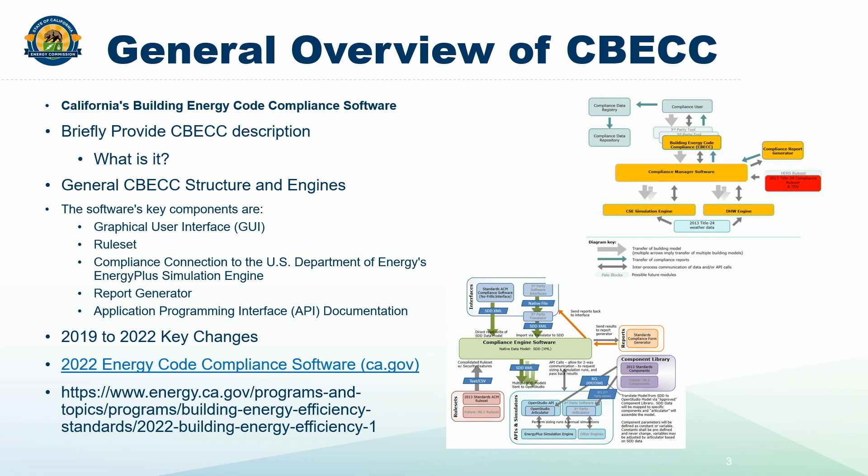So just quick changes in CBECC. We renamed it. It's not CBECC-Com anymore, it's CBECC. RJ or Nikhil, correct me if there's additional wording there. It's the simulation engine integration; we married the two, the CSE into CBECC. So for the dwelling units in multifamily, it's using the CSE engine, and common areas and non-res are using EnergyPlus. So it integrates both non-res and low-rise and high-rise multifamily.

The compliance is based on 3 metrics: efficiency, total compliance TDV, and total compliance source energy. Photovoltaic and battery systems are much more critical to achieving compliance. And we added project and building level inputs for air barrier. I joke, but I put the warp core engine here, and it performs much faster than it used to, but it is a fairly complex simulation engine that's in CBECC now.

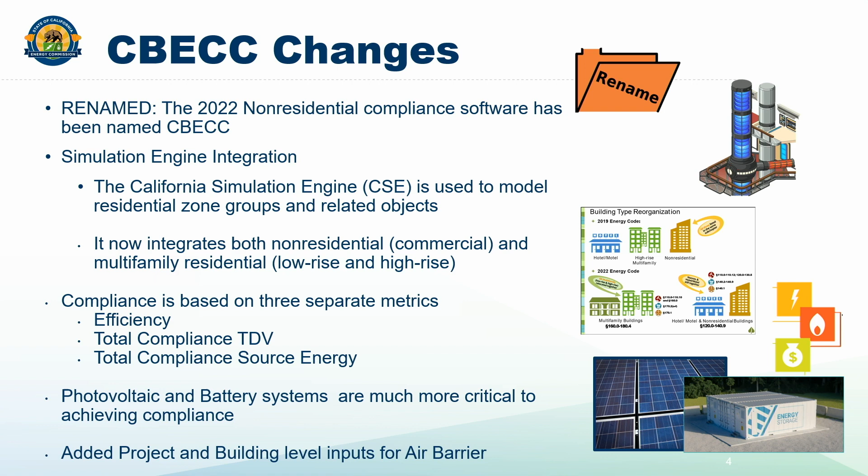So quickly, what changed from 2019? We obviously implemented the code changes that are coming to 2022. I really suggest you go to some of the resources that Chris O'Vera's O&E team has on the code changes, and also Energy Code ACE, but they will cover in detail what changed.

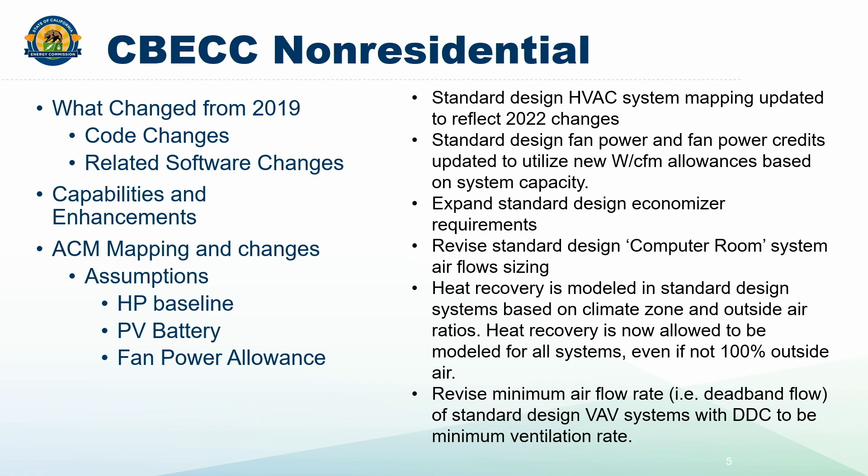So, standard HVAC system mapping has changed, and they reflect the 2022. Heat pumps are kind of a big adjustment. I think Meg Weltner in the Power Talks actually covered a lot of this stuff. Standard fan design power credits are implemented with allowances based on system capacity, expanded economizer requirements. So heat recovery is modeled in the standard design now, and airflow rate. So these are some of the new items that are included in the non-residential space.

So a lot of our resources were integrated, were put into multifamily restructuring. So that was a huge change this year. So what changed in 2019 is just integrating this into the energy model, or the energy software. So these projects that were compiled under 2019 will have to have some additional energy efficiency items to comply for 2022.

So this graphic here kind of shows what the software team was working on this year. So I already mentioned this, leverages both engines. There's some just new requirements in code.

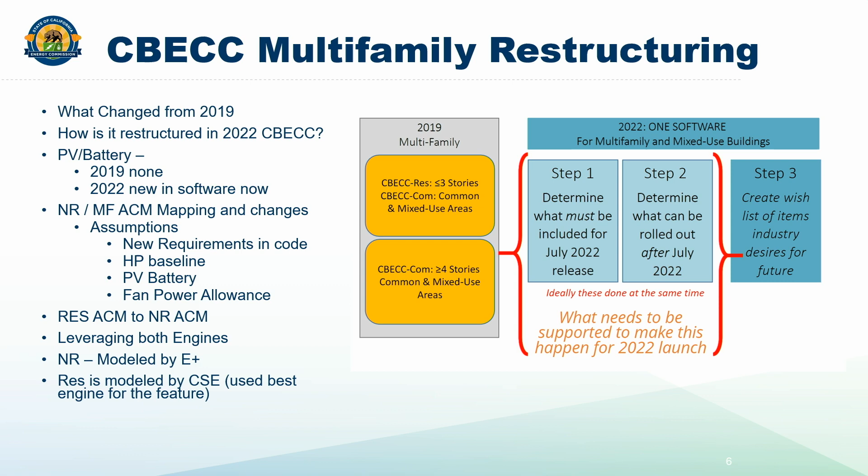All right. So, CBECC res changes, just quickly, we enhanced some capabilities. ACM mapping is updated, but this you can pretty much find on the CBECC what's new, but we implemented battery storage systems, and the previous versions only allowed for models with no on-site PV. We updated PV requirement exceptions, batteries. There's cooling design set points that were updated, ducting for heat pump and water heaters in conditioned space. There are some exceptions. There are items related to standalone batteries and dual fuel heat pumps that are in CBECC res.

All right. So all electric modeling is a little bit easier this year. I think Meg covered this, and she went into pretty good detail of where the pitfalls were and where they were more beneficial this year. But for the most part, if you proposed gas, then your standard design is gas, but if you propose electric, your standard design is heat pump. We added some demand response for heat pump water heaters.

And, basically, the standard design assumes heat pump water heater in all climate zones, but gas types are allowed in climate zones 3, 4, 13, 14. And then those systems also have a standard design that assumes heat pump space conditioning systems.

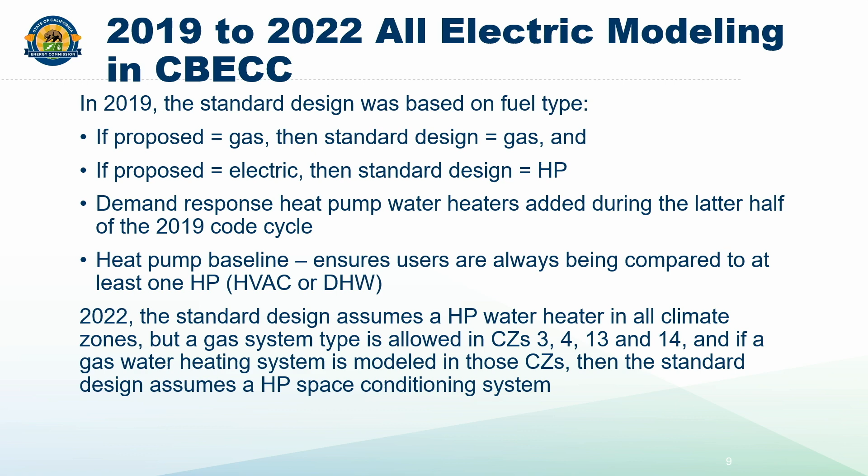Right? So I think we're aware of this, but you don't have to comply with 2 metrics anymore. It's 3. So efficiency, total compliance, TDV, and compliance source energy. So I don't necessarily know we need to go into this too much, and I'm sure other working groups have talked about this, but for the proposed building to comply, you're going to have to meet these 3 items.

So I guess thank you that we added the third, these metrics. For 2025, this is slightly changed, but we'll go into that.

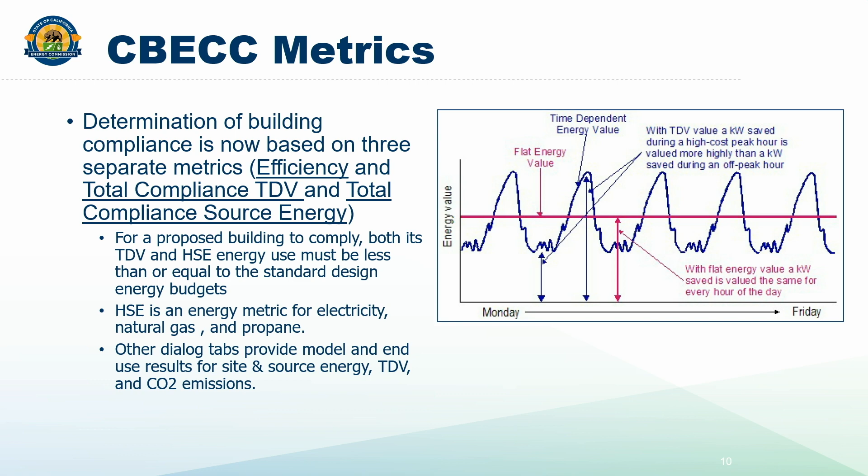Features and development. So these are items that we have worked on this year, are in the software, or going to be in the software. Just quickly, California Utility Allowance Calculator. Thank you to a lot of the CalBEM folks here that have helped with the non-residential air to water heat pump studies. And there's some studies on variable capacity heat pumps, an updated algorithm that's been included into CBECC res with, I call it the detailed input, but there's more data that you can use to generate the curves.

So we are looking into heat recovery chillers next. We are prioritizing heat pump related features and have a residential air to water heat pump that's currently being developed. My understanding is Bruce isn't here because he's working on that feature.

So the California Utility Allowance Calculator, I'm not sure if anyone's been paying attention. I think last week we had 2 workshops, and one of them was the, I'll say CUAC. To me, it's the Utility Allowance Calculator. I think Tao is somewhere here, but she's spent most of her life, and her and Scott have been real close friends over the past few months.

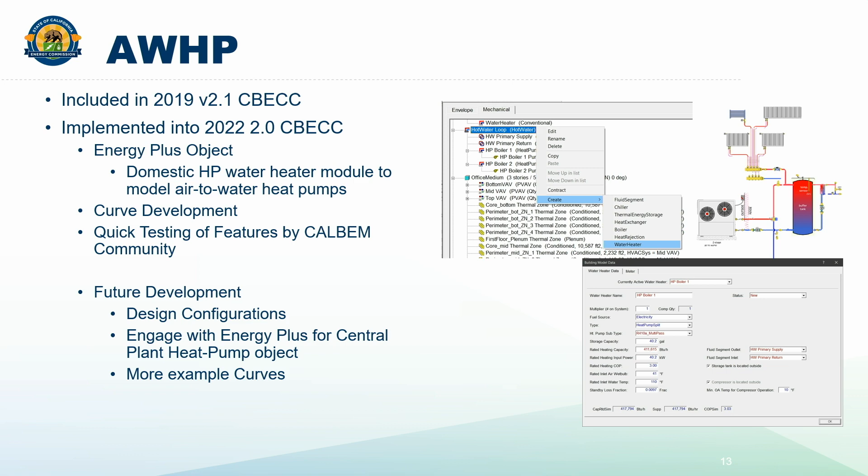All right. For variable capacity heat pump algorithm, I think we currently have a variable capacity compliance option. With the help of PG&E and the IOUs, we're looking at a different algorithm. I call it the detailed input, but you are able to put the data for the system, for different curves. This was taken a lot from the NEEP list, and it's expected to kind of expand systems that are not just low static and ductless, but it includes centrally ducted systems, so you can have more systems included.

So the model incorporates some of these items for ductwork losses, and what we've actually noticed was that the NEEP curves seem to better represent the performance of these systems than the actual ratings. Currently, we're working with the CalBEM community to look at this algorithm, and they're kind of sifting through this list. There's 39,000 systems in the NEEP database, and we're kind of looking at how they're classified and what systems there are.

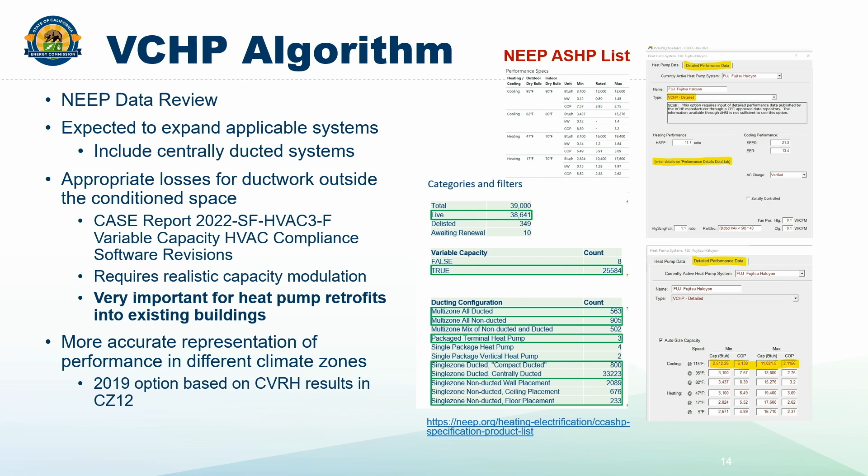So we're hoping to get that project completed by the end of this year, and figure out if we should find ways to incorporate this algorithm into another compliance option. As I said, it's not need data, it's NEEP data, but it seems to be a better representation of the VCHP systems. So those are kind of the items that we've been working on over the past year.

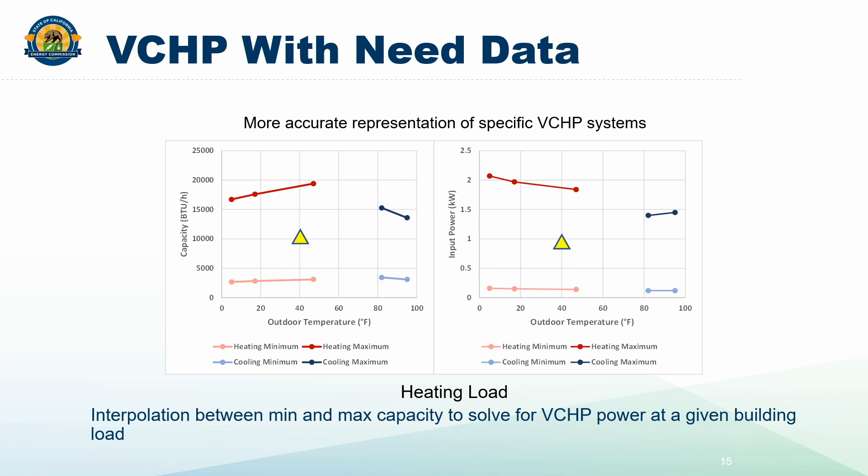There's a lot on our plate, but I wanted to focus a little bit of this discussion on the priorities and collaboration. I think it's important that we leverage the use of this community to get a better understanding of what the industry and stakeholders need for our software. And the general ask is we're seeking support to evaluate the current process of how we get features into software and establish a mechanism to bridge that gap between the features list and implementation.

There's a countless amount of studies and surveys that tell you what is out there, what's needed to meet California's goals and the new technology out there. But we need to start figuring out how to get from lists and ideas to implementation in the software. So our current tools that we use are SourceForge. Once you get the presentation, you can click on these, but we have CBECC, CBECC Res, SourceForge. We are starting to look at using GitHub to track and manage bug fixes.

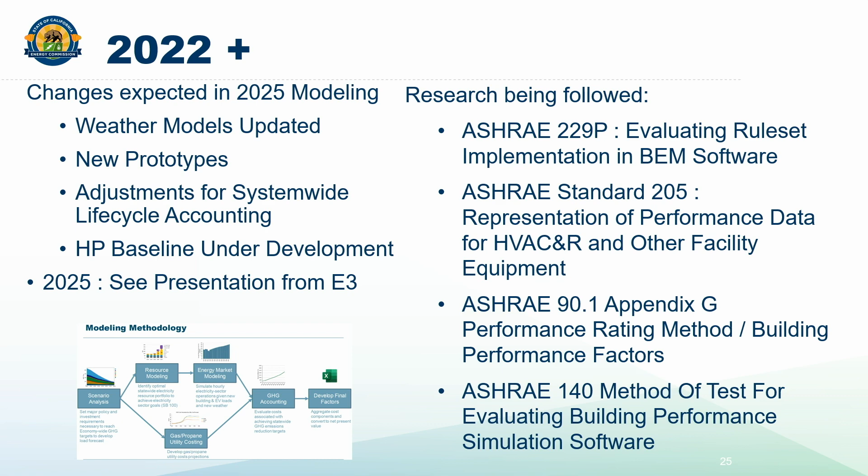So just collaborative presentations, I'll leave it at that. These are projects that are ongoing that are coordinated with what we're working on. So Jared's going to talk about metrics, life cycle cost source energy metrics, the compliance manual solution, Energy Solutions spearheading that, and then Haley with his task of looking at the energy conservation documents.